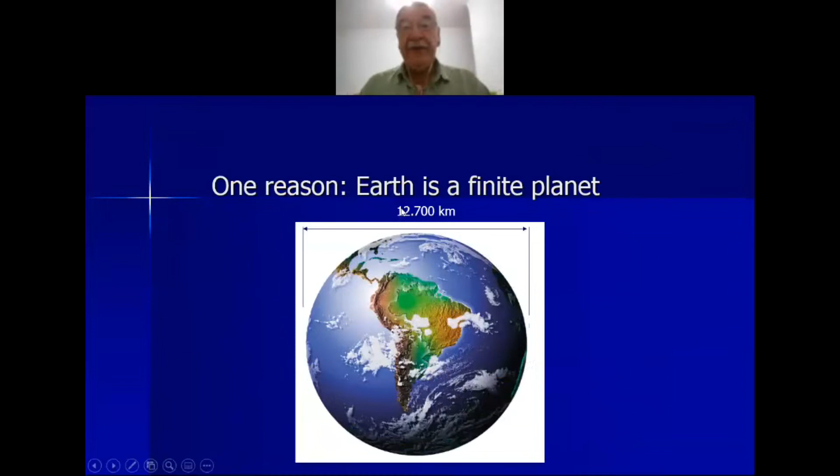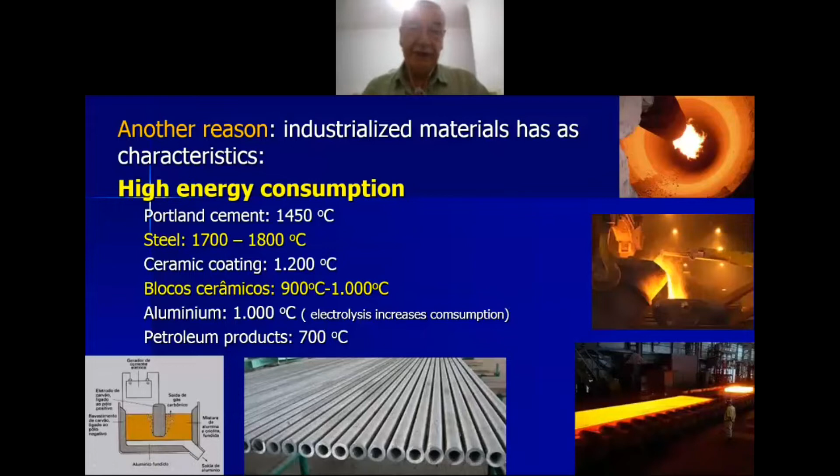Talking about bamboo in the 21st century, with so much technological development - one reason is that Earth is a finite planet. Another reason: industrialized materials have as a characteristic high energy consumption. If we see the temperatures needed to fabricate them, we see that these industrialized materials have incorporated a lot of energy. On a finite planet, energy has been the cause of international conflicts created by dominant countries that need to ensure their futures based on energy.

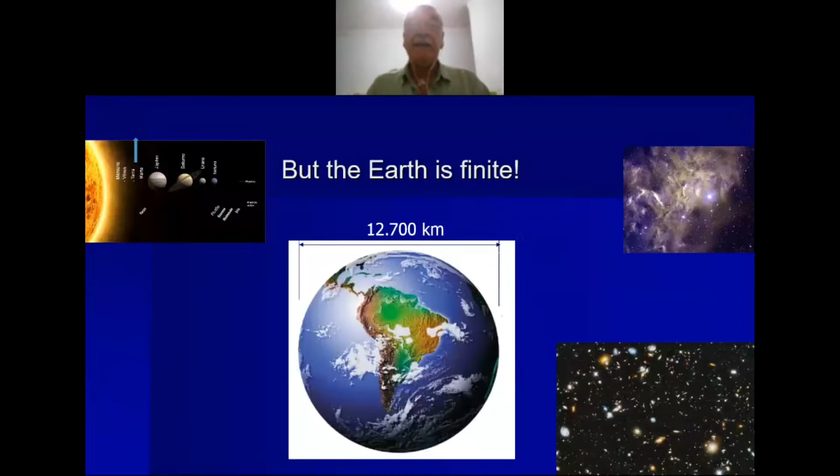One more reason is that the world population is arriving at 8 billion people. Besides food, all these people need homes, infrastructure, energy, etc. But the earth is finite. And the current way of life, actual capitalism, is very cruel. It requires a lot from the earth. It's a system based on consumption, on infinite growth.

This system needs large scale production, and it goes against common sense on a finite planet. This capitalism has no brakes, no limits, and the accumulation of goods is part of this. Extreme inequalities necessarily arise on a finite planet.

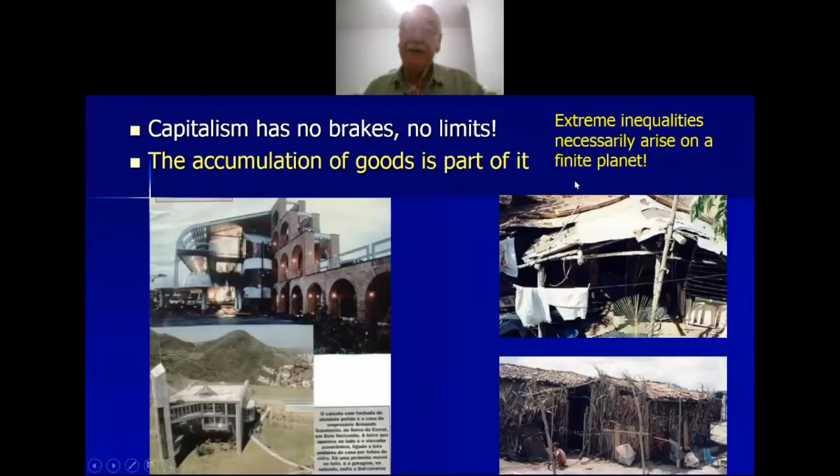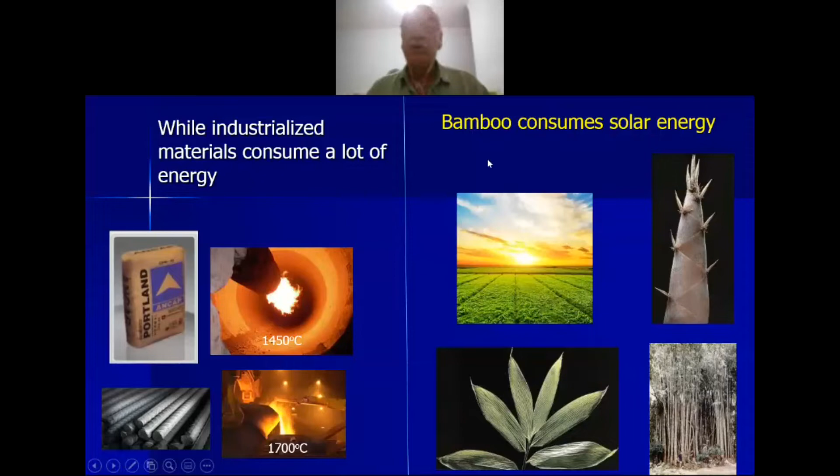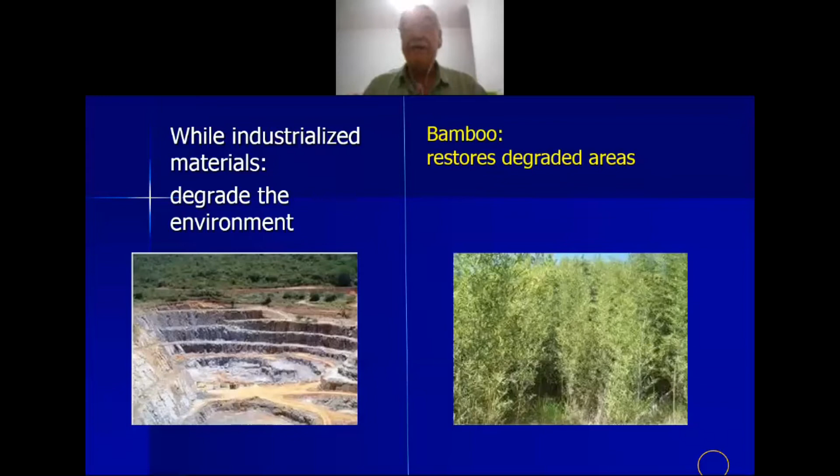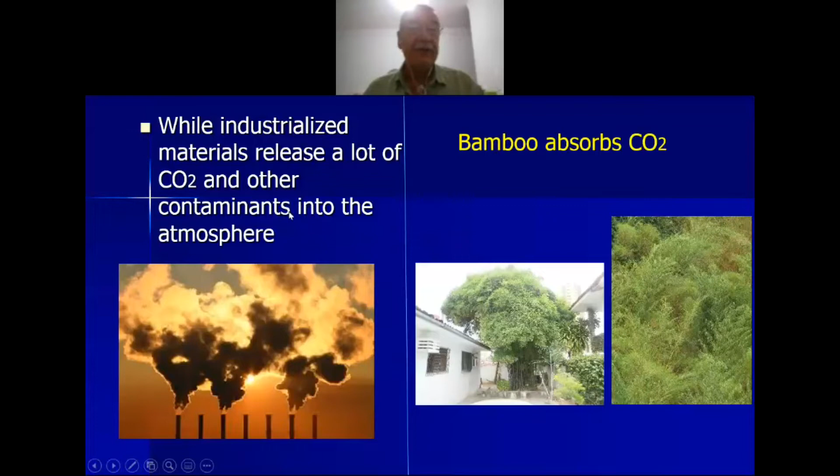But what does bamboo have to do with this? While industrialized materials consume a lot of energy, bamboo consumes solar energy. While industrialized materials consume non-renewable raw materials, bamboo is a renewable material. While industrialized materials degrade the environment, bamboo restores degraded areas. While industrialized materials release a lot of CO2 and other contaminants into the atmosphere, bamboo absorbs CO2.

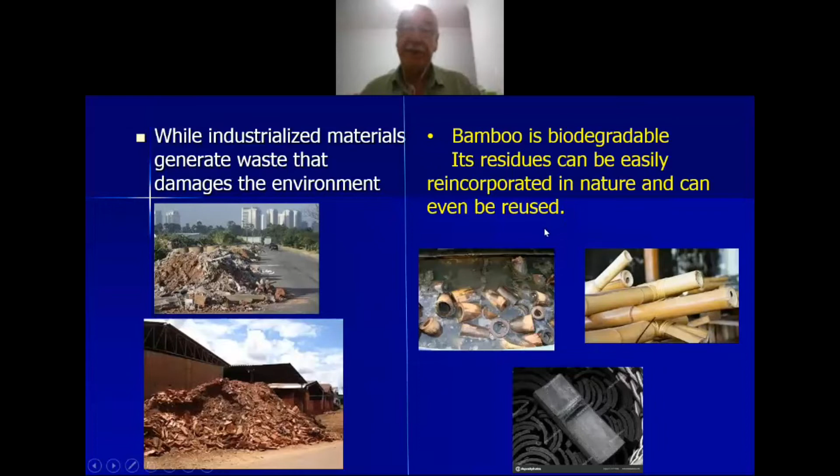While industrialized materials generate waste that damages the environment, bamboo is biodegradable. Its residues can be easily reincorporated into nature, even reused. While industrialized materials require a complex installation to be produced, with sophisticated technology, bamboo is easily produced by nature.

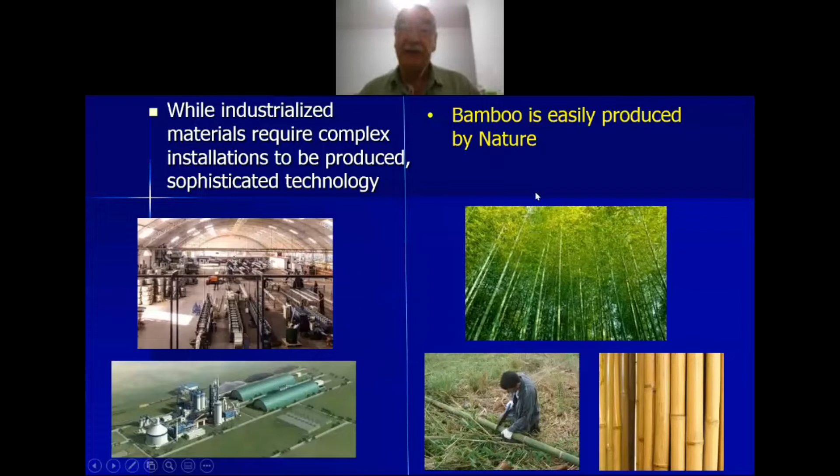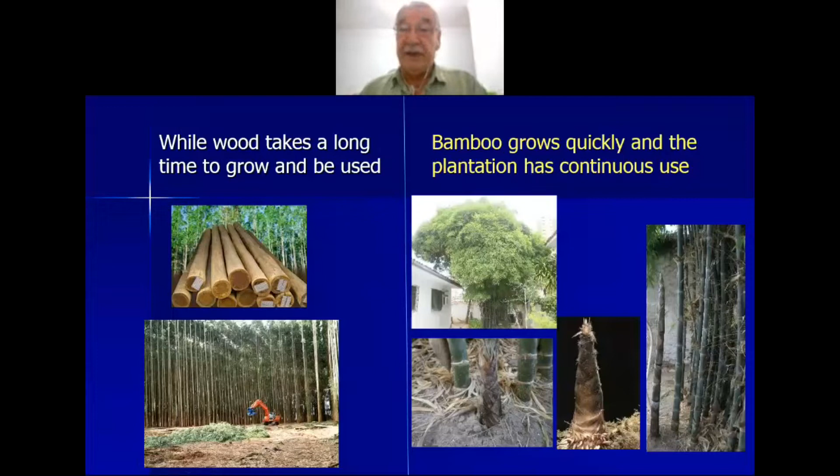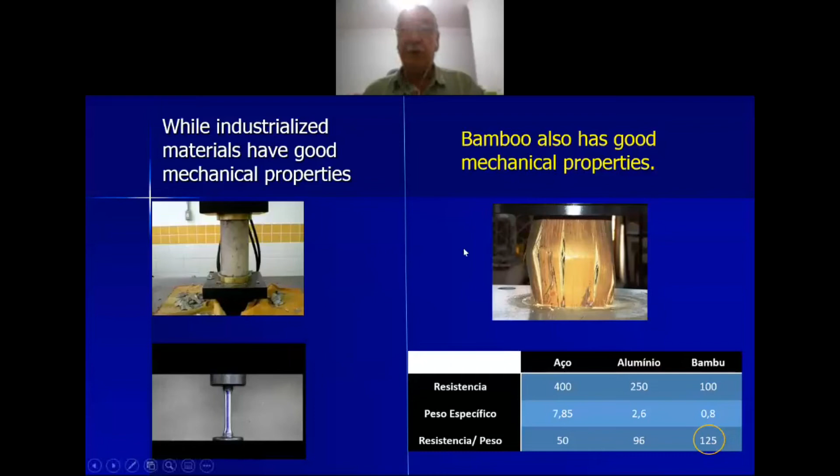While wood takes a long time to grow and be used, bamboo grows quickly and plantations have continuous use. While industrialized materials have good mechanical properties, bamboo also has good properties. Bamboo can replace a lot of products, including plastic. We know there are more than 5,000 products made with bamboo.

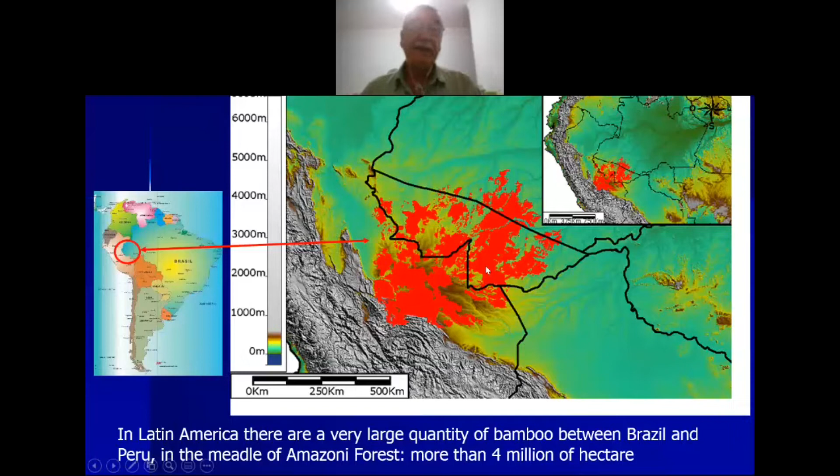And in South America, there is a very large quantity of bamboo between Brazil and Peru in the middle of the Amazon forest - more than 4 million hectares in this area. In Brazil and other Latin American countries, the destruction of original forests is increasing.

We intend to introduce bamboo as the main alternative. A great contribution to the knowledge in Latin America and the world was made by the Colombian architect Oscar Hidalgo. His last book was 'Bamboo, the Gift of the Gods.'

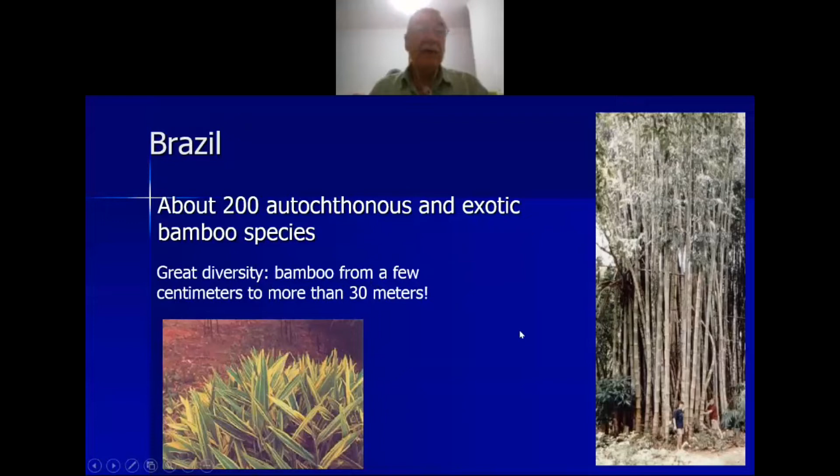In Brazil, we started the first systematic studies. In Brazil, there are native and exotic bamboo species, with great diversity - bamboo from a few centimeters to more than 30 meters. Exotic species are the most used in architecture.

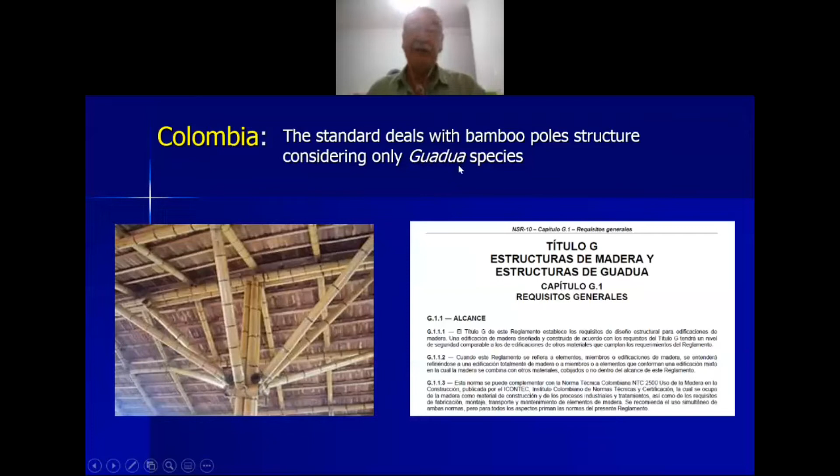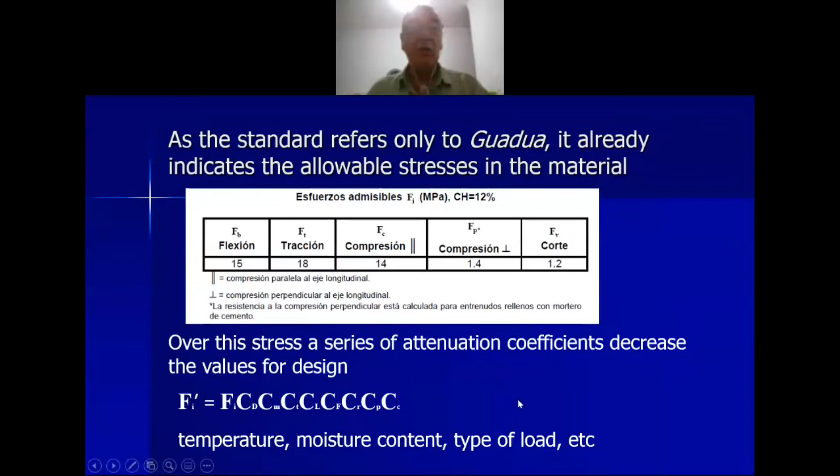Over this stress, a series of attenuation coefficients apply for load, etc. For me, it's an exaggeration, the number of coefficients - concerning always guadua, guadua angustifolia.

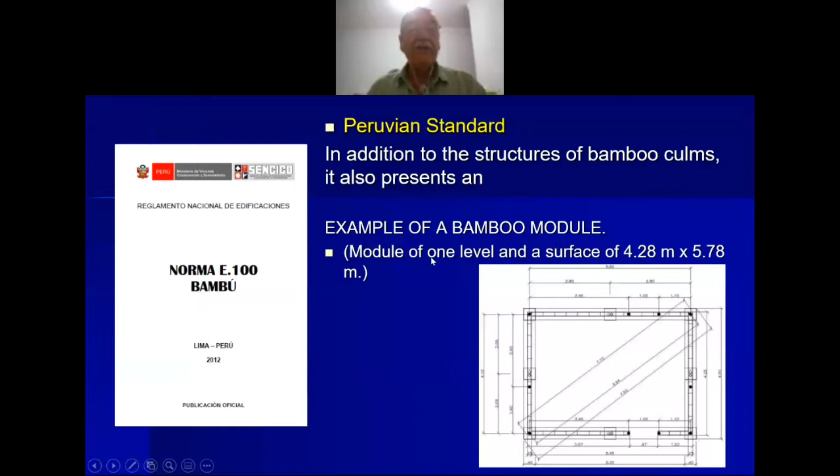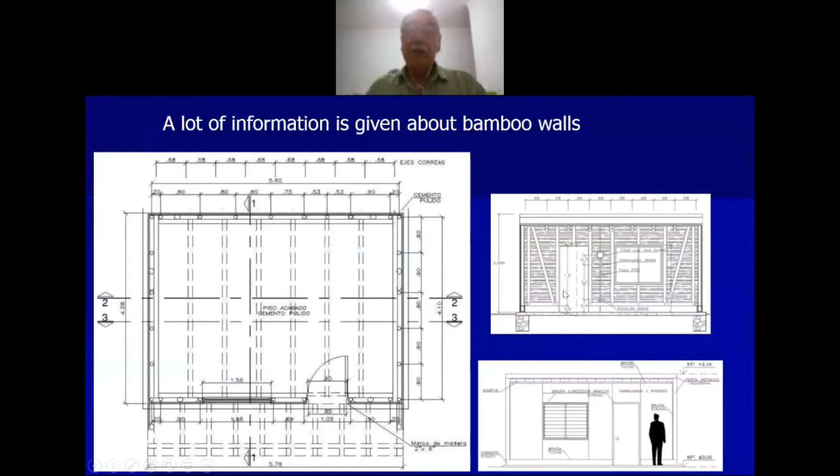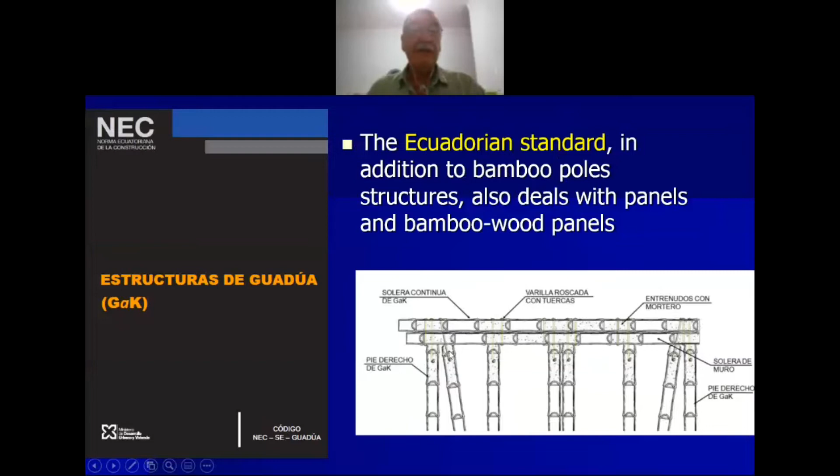The Peruvian standard, in addition to the structure, presents a module. There is a lot of information about bamboo walls, as you can see with this type of wall. In the Ecuadorian standard, in addition to bamboo pole structures, it also deals with bamboo wood panels, with many details given about the panels.

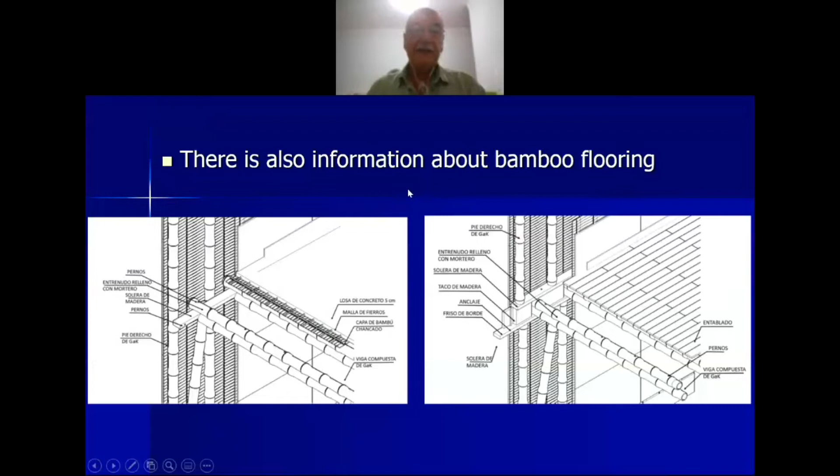Bamboo wood panels - it's a big standard they have in Ecuador. In Brazil, we have three standards.

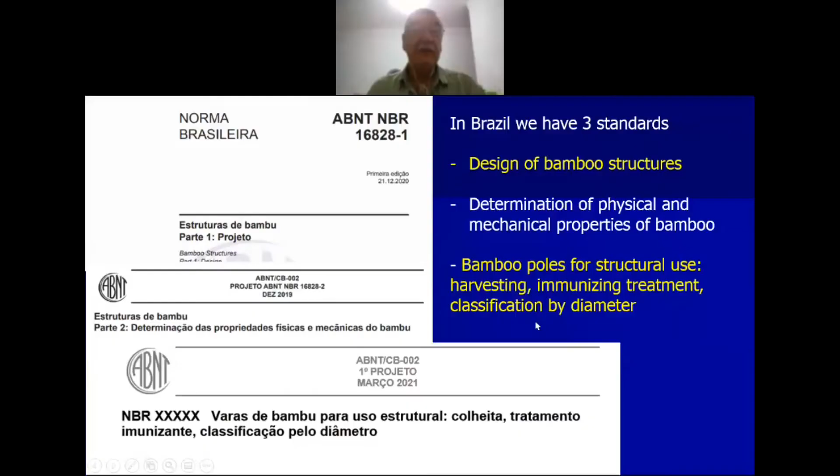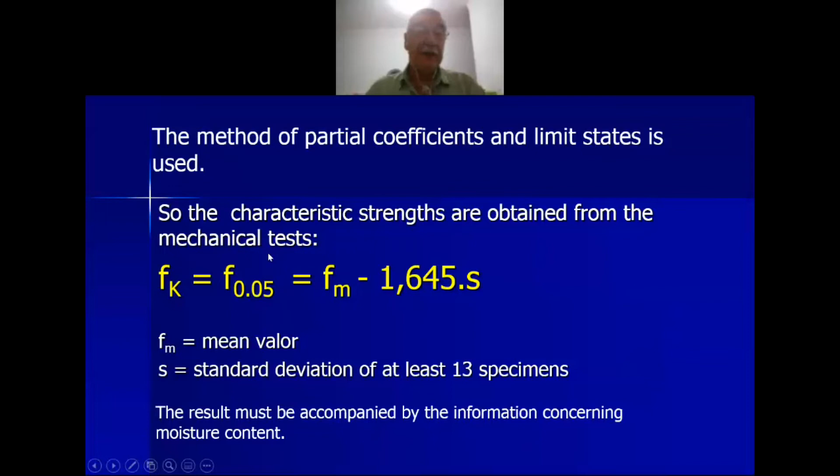These deal with partial coefficients and limit states. The characteristic strengths are obtained by mechanical tests, and as compression strength is the easiest to obtain, the standard relates the other mechanical properties to it. So tensile characteristic strength, we can say, is related by a factor to the compression strength - characteristic compression strength parallel to fibers, and shear, compression perpendicular, flexion, and elastic modulus.

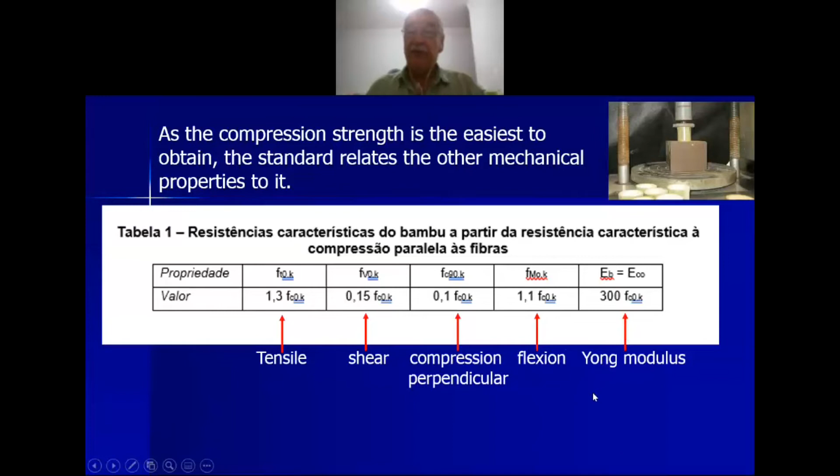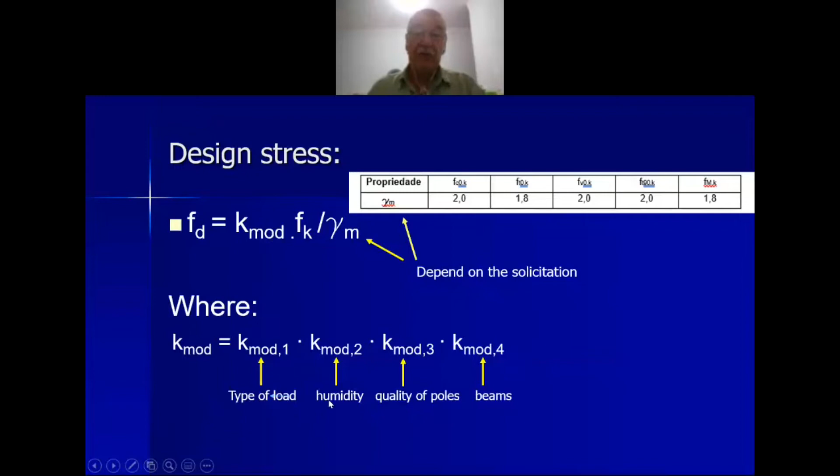Design stress modifies the characteristic stress by two coefficients: one related to materials, which depends on the solicitation, and another to consider the type of load, humidity, and quality of the poles. This one is for beams.

To control quality, 13 specimens must be taken from at least 6 different culms per batch of a maximum of 250 stems.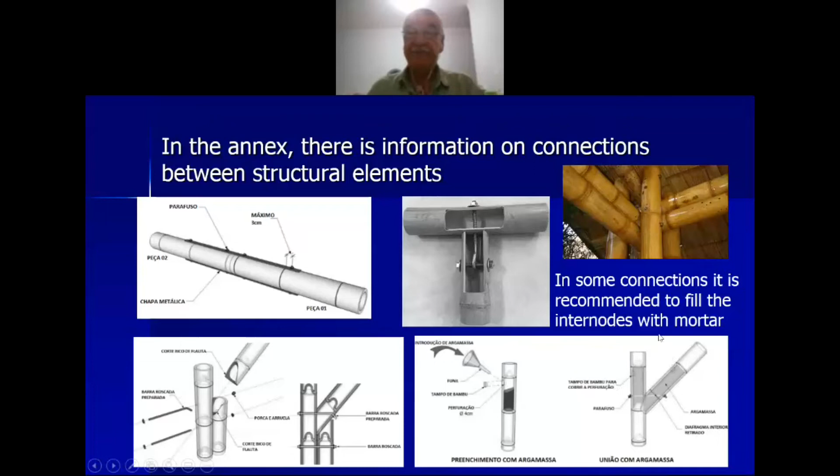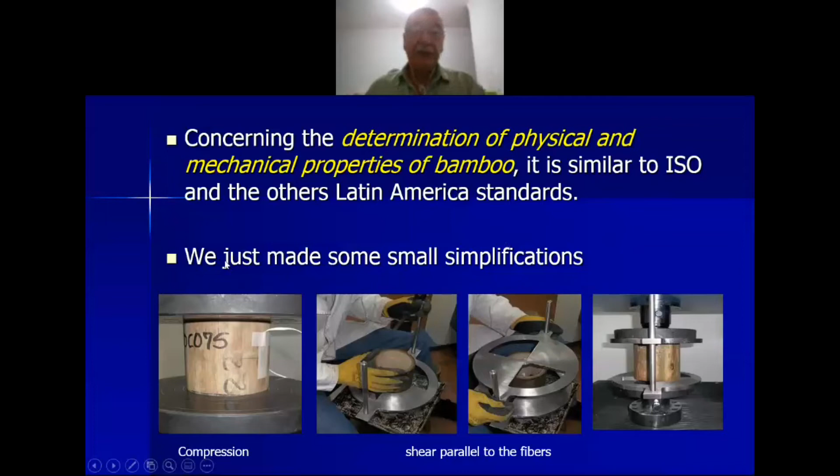Concerning determination of physical and mechanical properties, it's similar to the other Latin American standards and ISO standard. We just made some small simplifications.

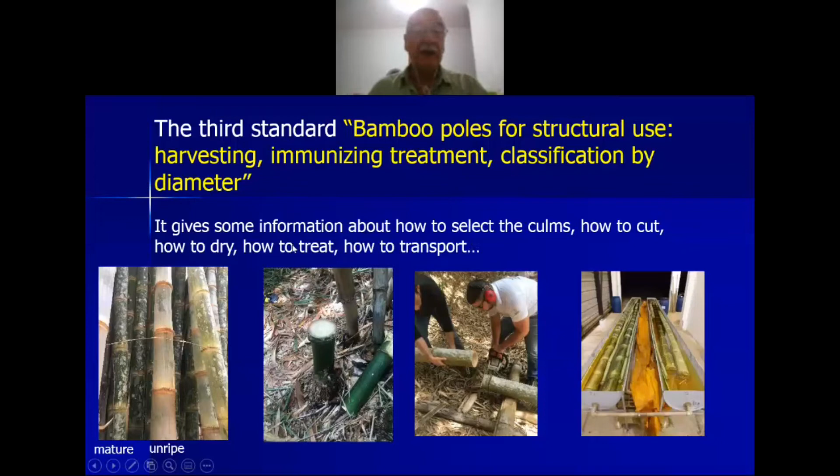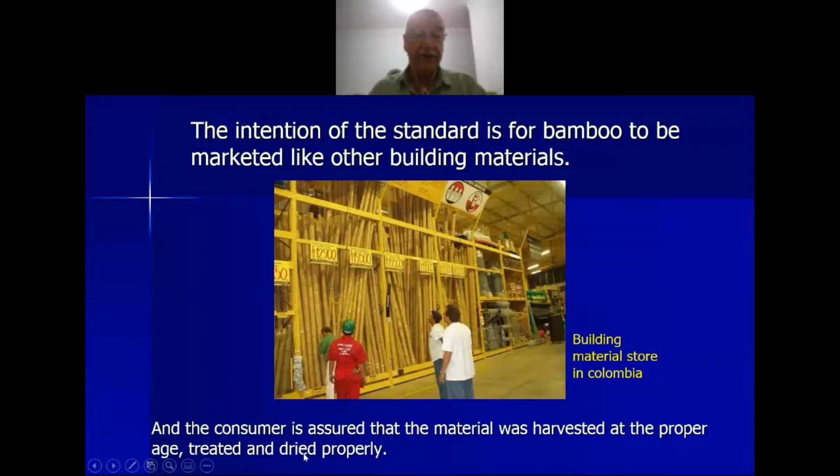The third standard, bamboo poles for structural use, covers harvesting, immunizing treatment, and classification by diameter. It gives information about how to select the culm, how to dry, how to treat, and how to transport it. The intention of this standard is for bamboo to be marketed, and the consumer is assured that the material was harvested at the proper age, treated and dried properly.

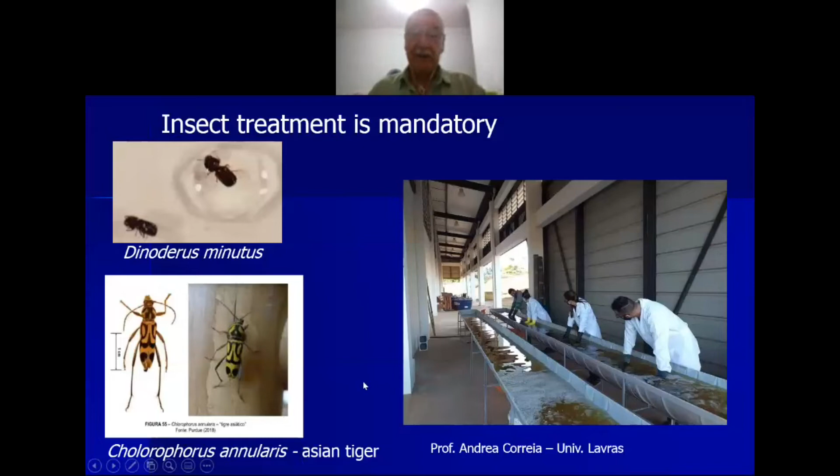Insect treatment is mandatory. Here, this is called the Asian tiger. Insects completely destroy the bamboo and the bamboo structures.

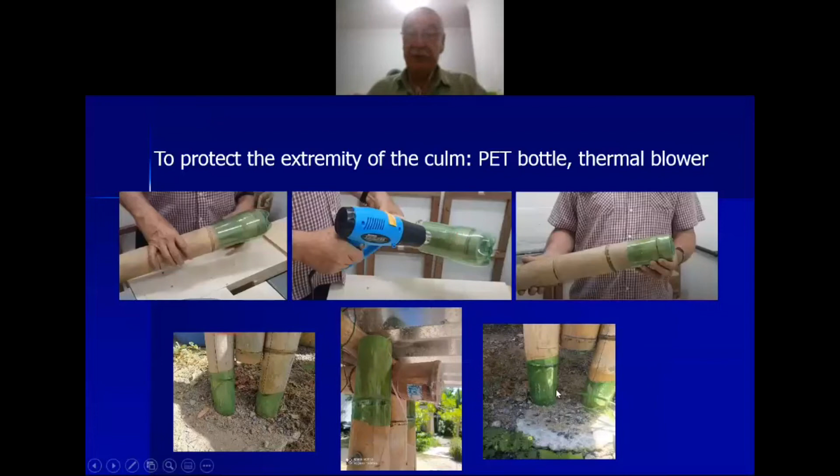To protect the extremity of the culm, a good idea is to use a PET bottle and hot air. This protects the bamboo. Grading by diameter, we want bamboo poles that can be commercialized with lengths of 3 meters and 6 meters.

It's interesting to fix that the difference between the maximum diameter and minimum diameter is limited, to guarantee that the conicity of the bamboo is in accordance with the standard of design of bamboo structures. And also, the curving of bamboo is limited to this value.

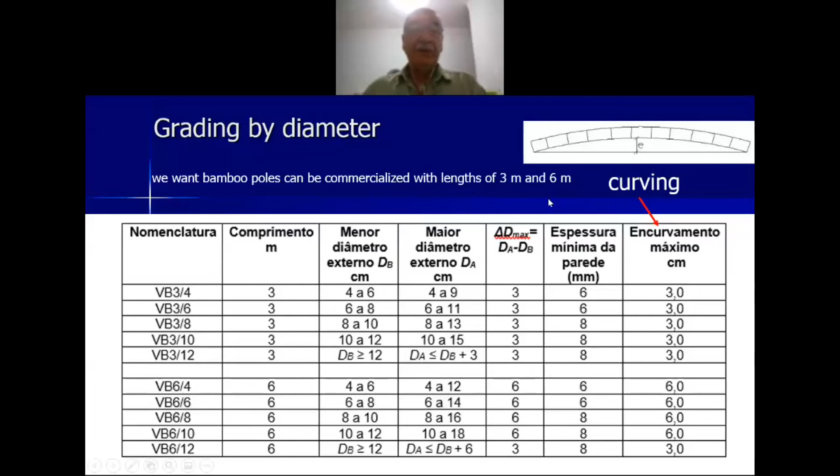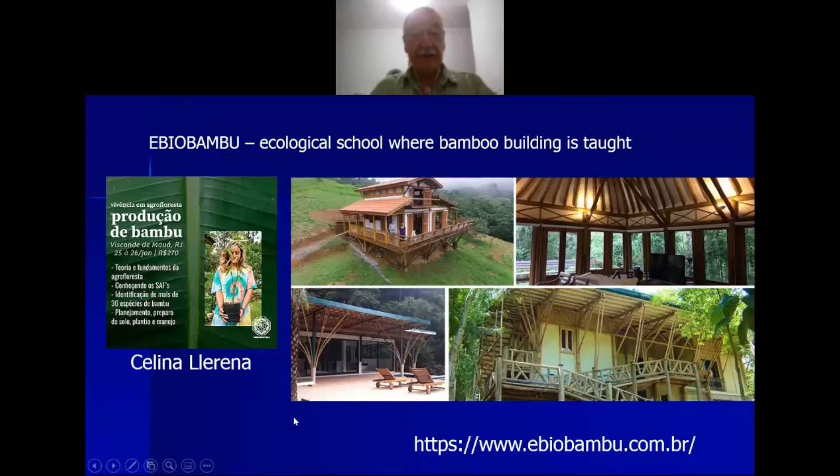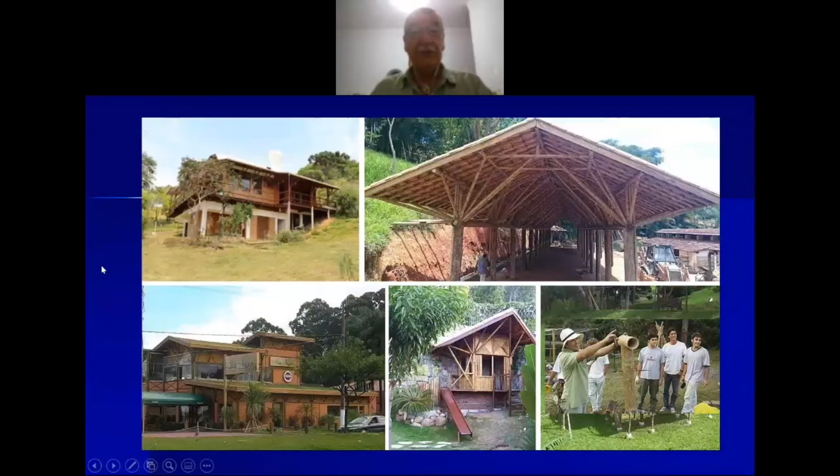Some bamboo construction in Brazil, the biggest one is in the Cultural Center Max Feffer in São Paulo, and the Recreation Center in Amazonia. EBIOBAMBU is an ecological school where bamboo building is taught. Celina Llerena is the director, who has built a lot of interesting constructions using bamboo. We can see here several constructions from Celina.

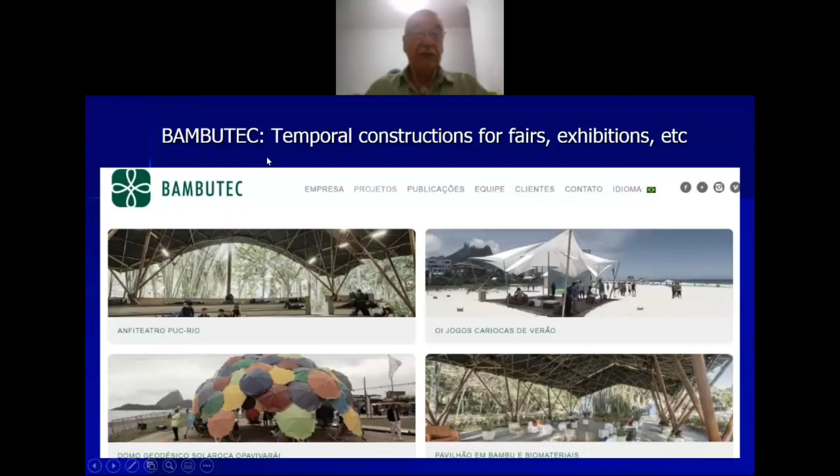For using bamboo, what is the market here in Brazil? Here is a gym at the Catholic University of Rio de Janeiro, made by this group.

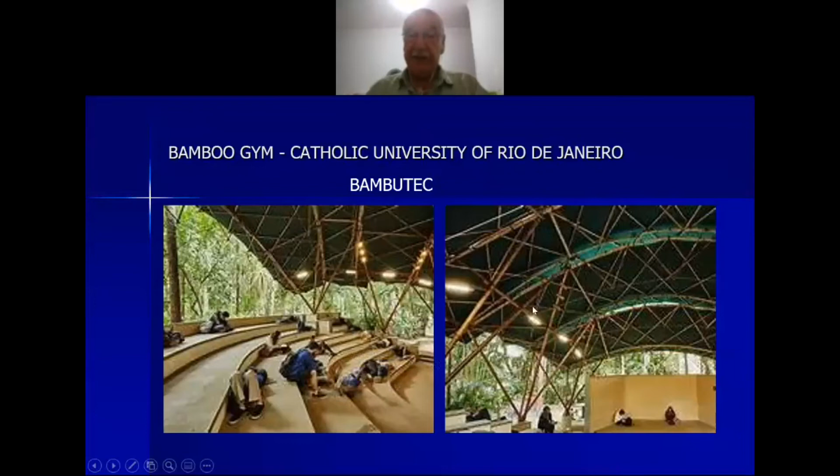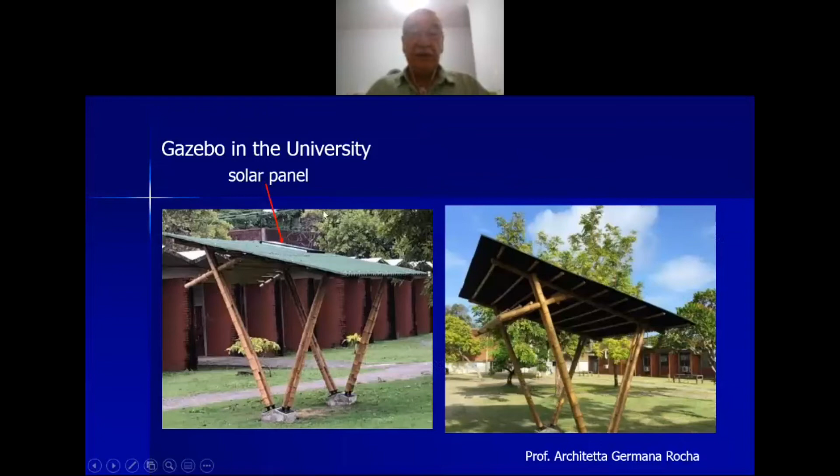Interesting, they use only this type of connection. This is not a temporary construction, but they use this type of connection. This was made at the university, a bus stop in bamboo.

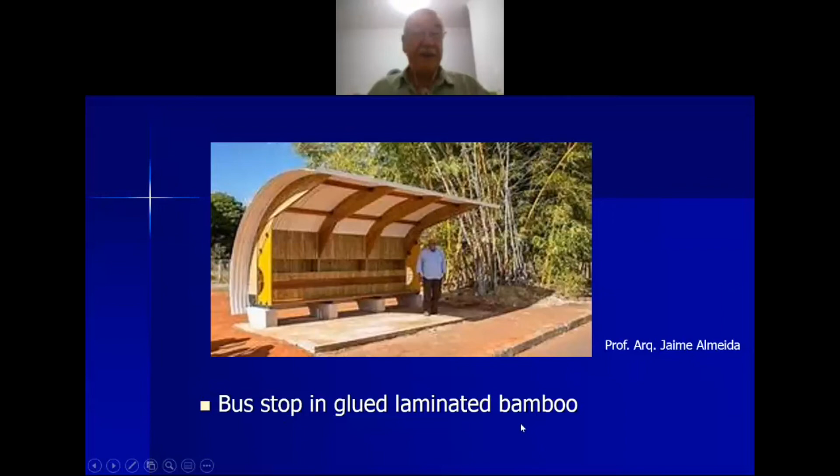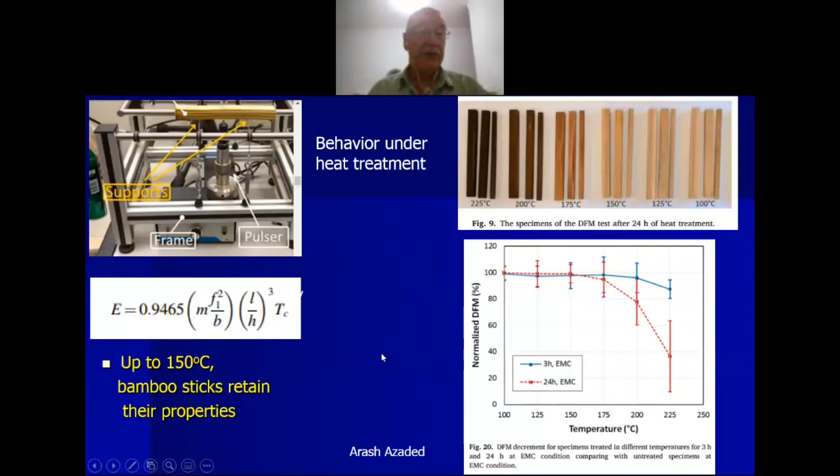Some work in Brazil on heat treatment. We have here the behavior under heat treatment of bamboo. We can see even at temperatures close to 150 degrees, bamboo sticks retain their properties.

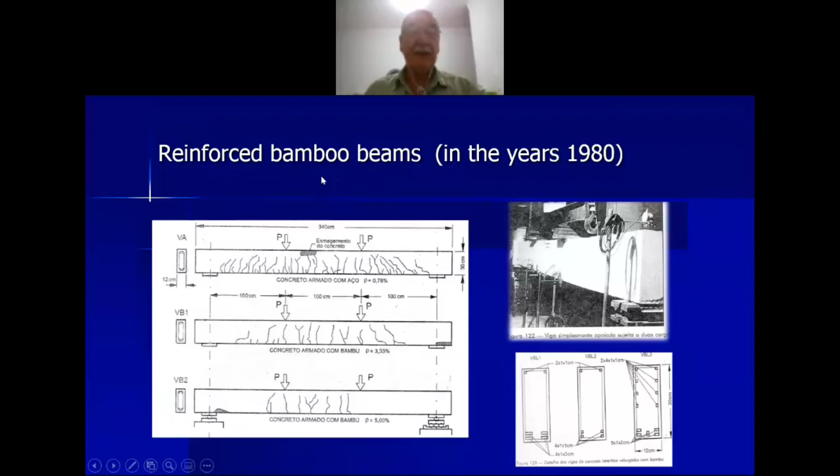At the beginning, in the years '80, we started to study bamboo, and the idea was to reinforce concrete beams. But we did a lot of tests, and the performance was not very good due to the low modulus of elasticity of bamboo, which can be half of the concrete.

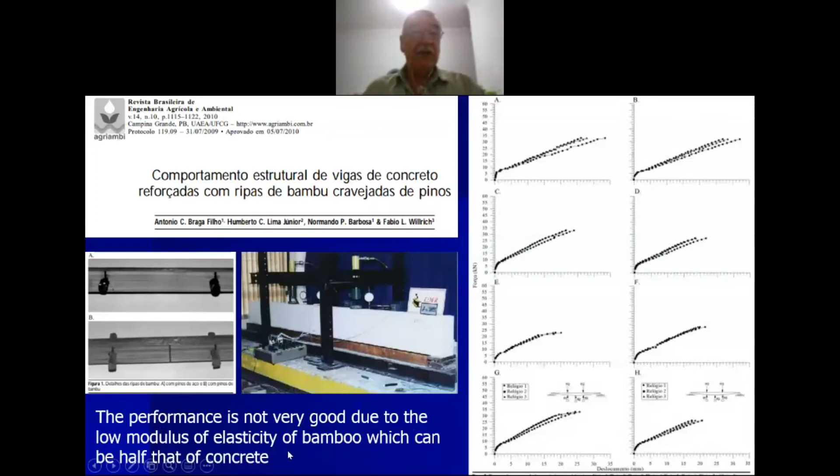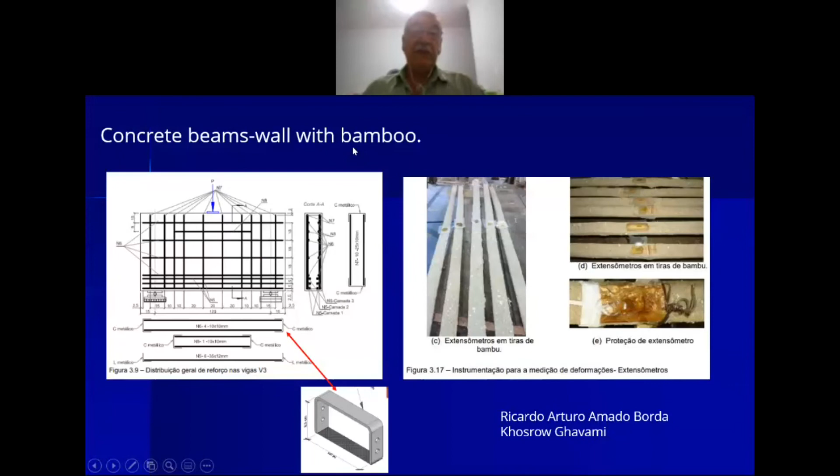We also studied bond strength of bamboo-concrete, the durability of bamboo as concrete reinforcement, and concrete beam walls with bamboo. The maximum load is significant, but it showed an almost brittle break. It's not interesting to use bamboo as reinforcement material in concrete.

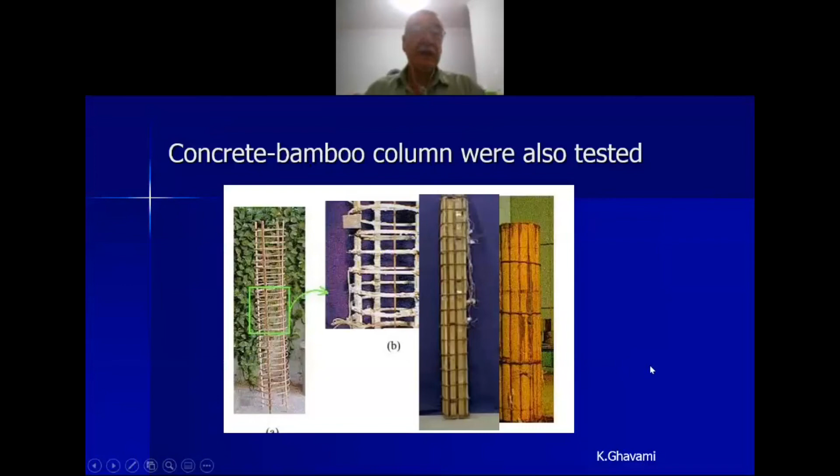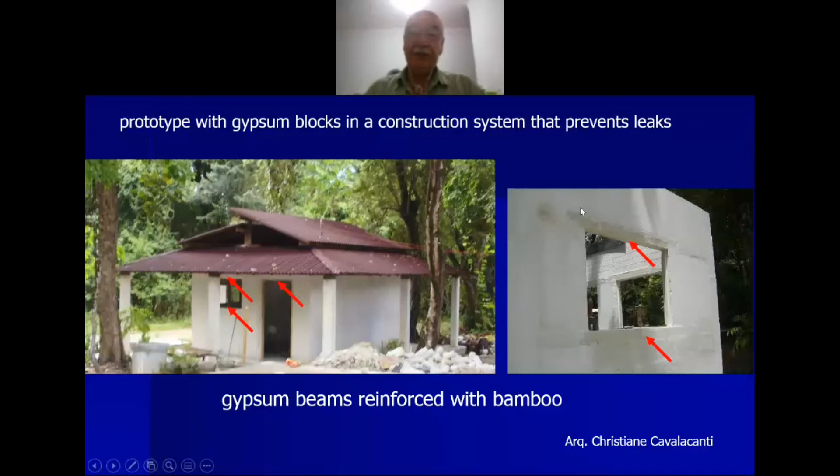Small gypsum beams reinforced with bamboo. This prototype, we used here this kind of small beams. And since 2008, pathologies went out.

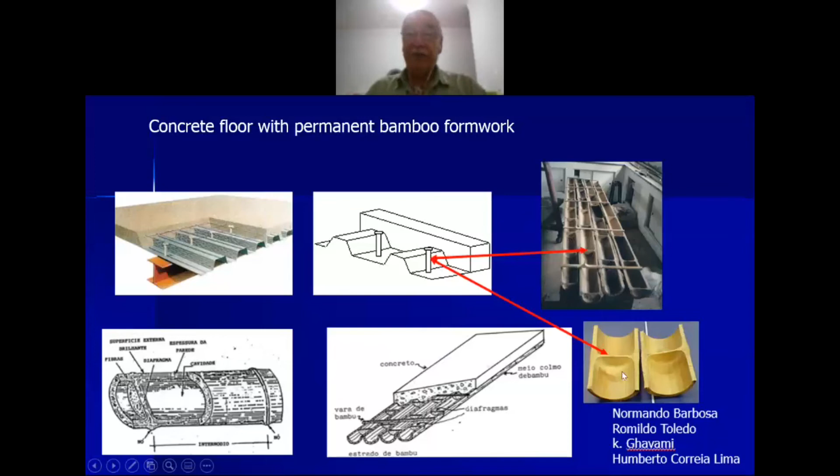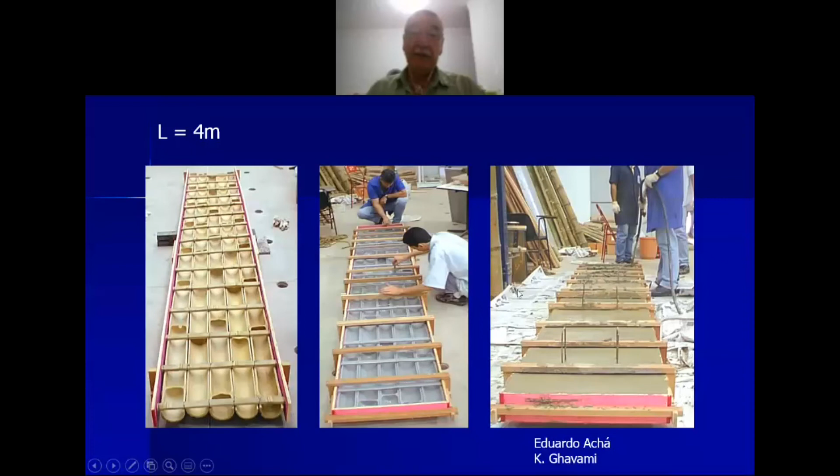An interesting way to use bamboo is as permanent bamboo formwork, for example. In steel, we have special connectors. In bamboo, we have natural connectors. So we can use half of the culm and concrete, and we have a good floor. It performs very well, but it is very flexible. For normal loads, it works well.

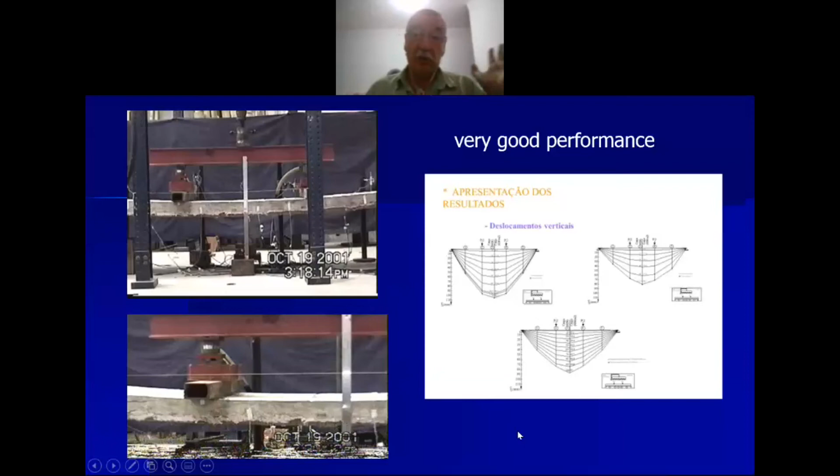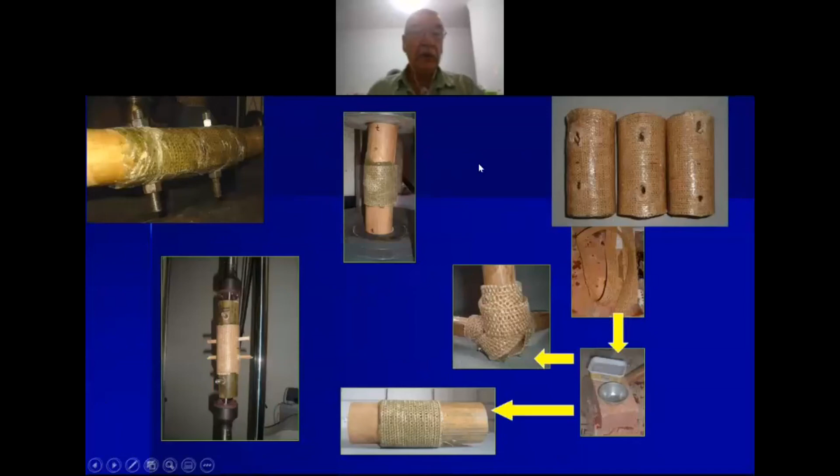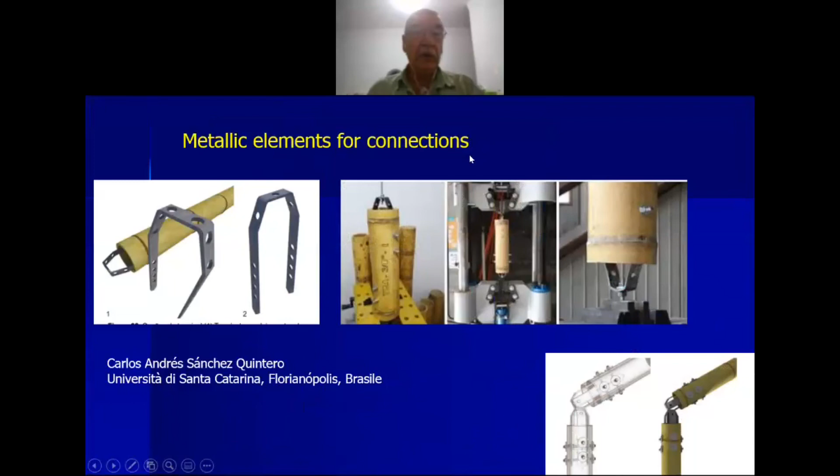Bamboo was also studied for development of connecting elements and metallic elements for connections. The idea is to use big blocks using microconcrete, cement and sand. Pieces of bamboo are placed in the formwork, and the microconcrete completes the block. There is an easy and fast construction you can do using this.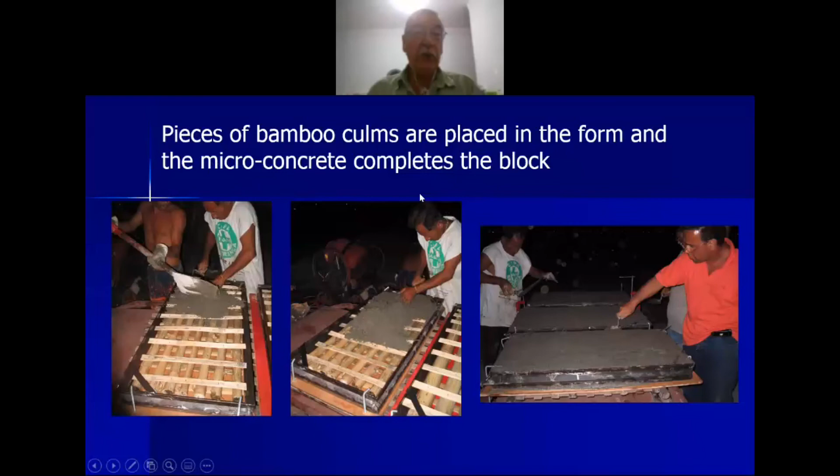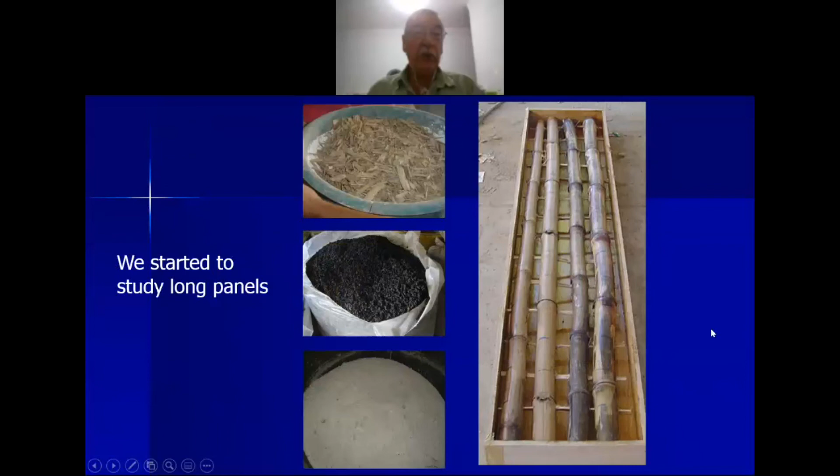The first prototype from 2004. We started to study long panels. Using this, the high load bearing capacity is incredible, up to 20 tons here at the top of this.

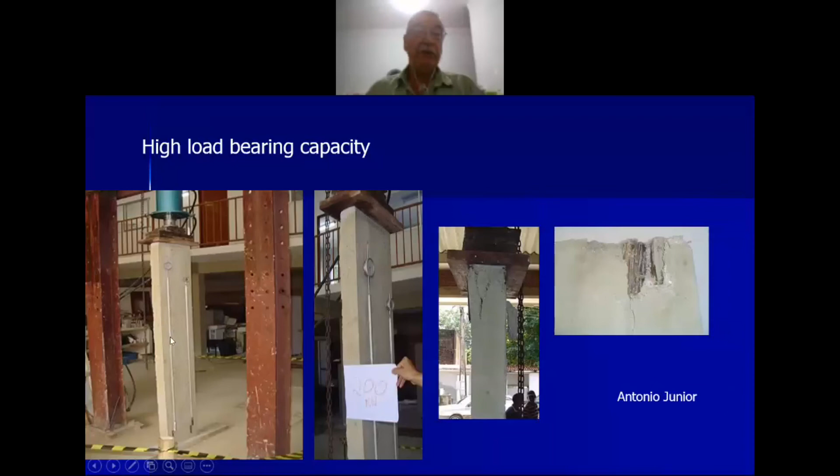Impact test of the body impact. As you can see from the test, the maximum load capacity is 37 tons per meter. We also ran bending tests and thermal tests.

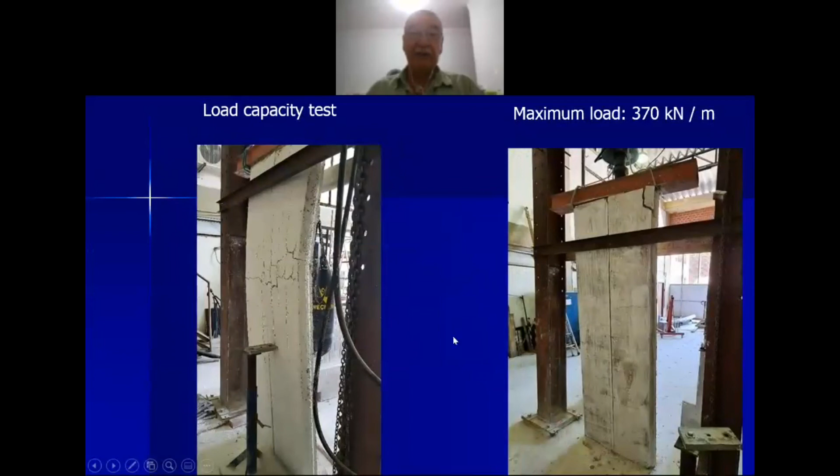And bamboo microstructure, everybody knows that these are the vessels here. We are studying the impregnation of the vessel with polymeric resins to put some product here.

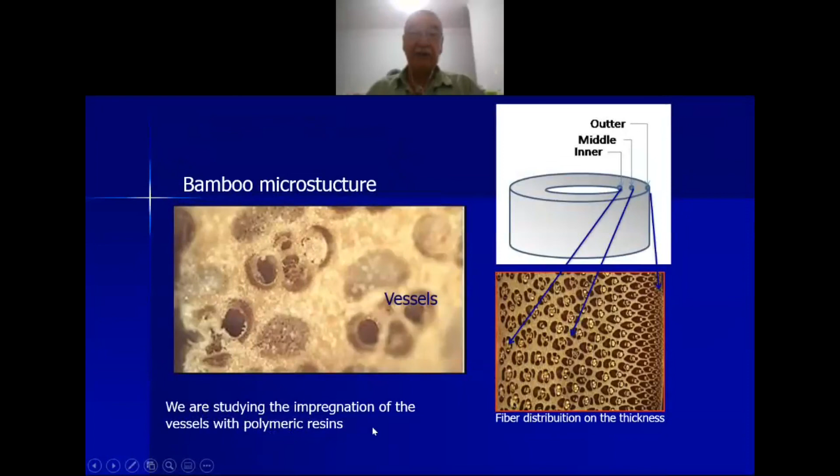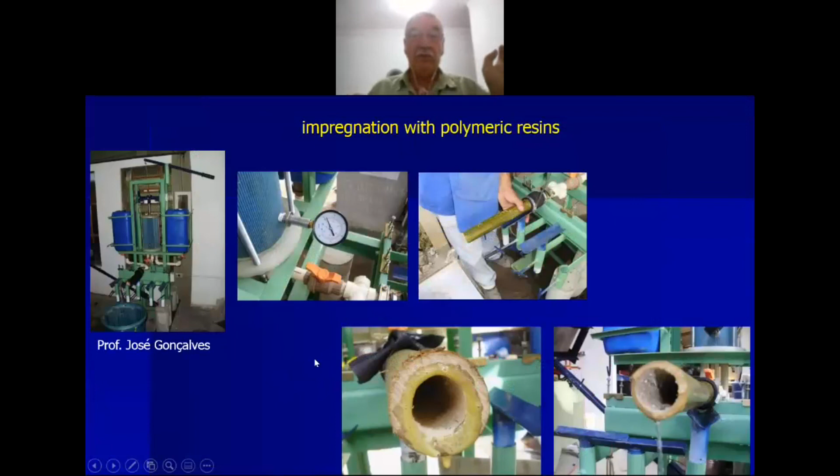Impregnation with resin is not easy, it's very difficult. We have managed to impregnate small pieces until now. We need to improve the method to have long pieces of bamboo impregnated, but it works very well against insects.

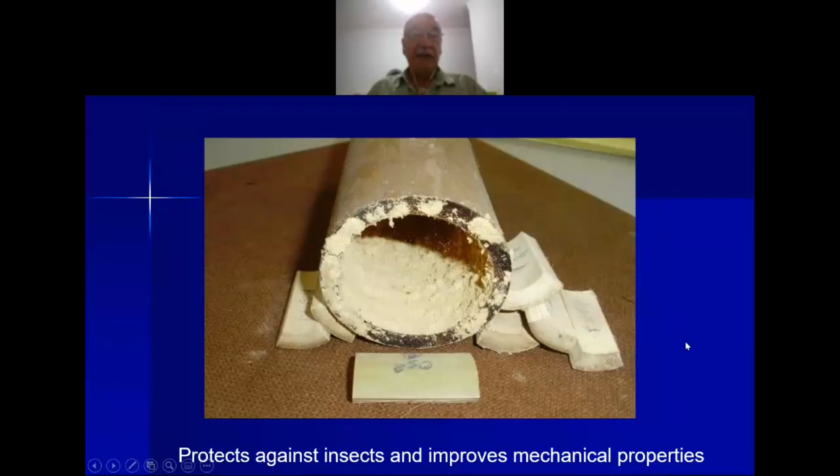Well, the future of bamboo in Brazil is promising. We have a Rede Brasileira do Bambu, a national network of research and technological development integrated by researchers, technicians, and professionals of universities and research institutes.

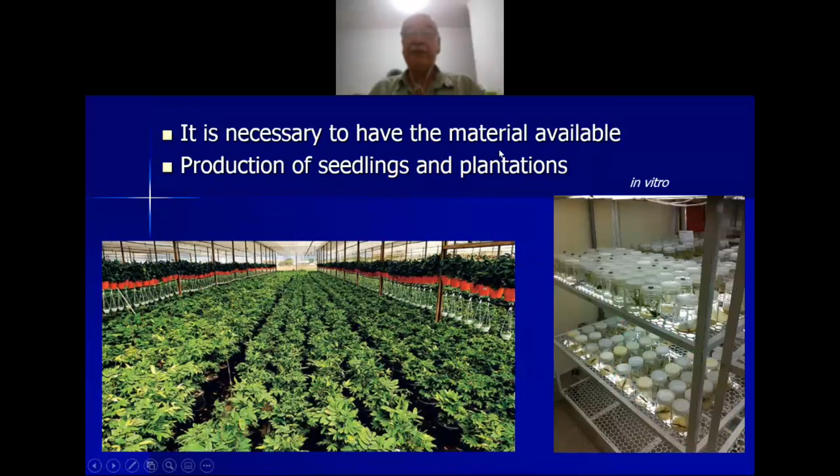It's necessary to have material available. Production of seedlings and plantations is necessary. As Brazil is very large, plantations are needed in all the regions to avoid long distance transport. There are currently numerous WhatsApp groups, bamboo groups in Brazil.

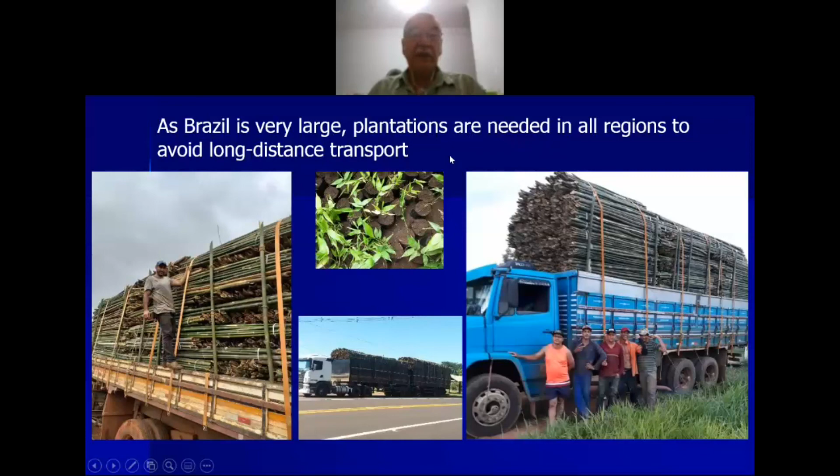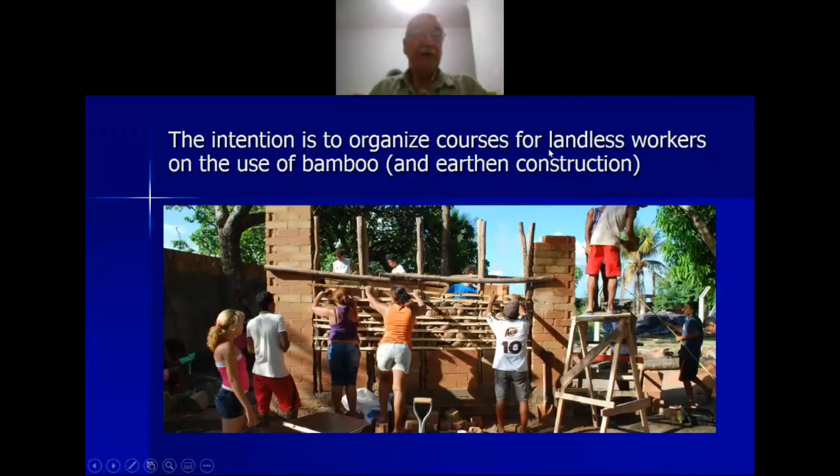They live inside the bamboo plantations and do not know how to use and exploit this material. The intention is to organize a course on the use of bamboo, and so bamboo can also contribute to improving living conditions for many people in Brazil. Thanks very much for your attention.

Thank you so much, Normando. It has been a wonderful presentation, and I look forward to more collaboration with Brazil, especially in construction. Your expertise is wonderful, and thank you so much again for speaking. Thank you so much. Thank you.